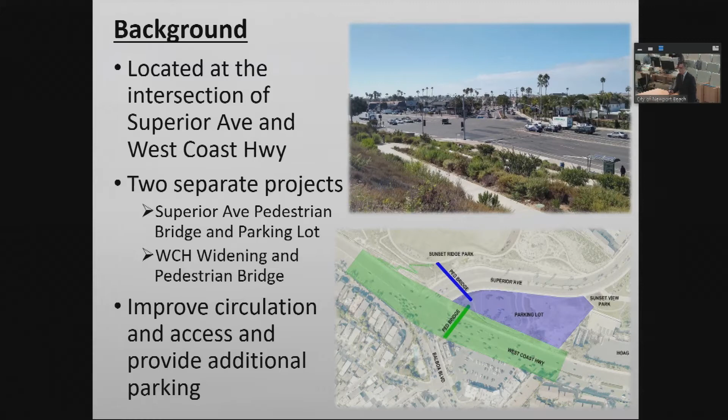This project is located at the busy intersection of Superior Avenue and West Coast Highway. The proposed improvements are comprised of two separate projects: the Superior Avenue Pedestrian Bridge Project and Parking Lot Project, highlighted in blue, and the West Coast Highway Widening and Pedestrian Bridge Project, highlighted in green. The primary purpose of this project is to improve circulation and access for both vehicles and pedestrians, as well as provide additional parking, especially for visitors to Sunset Ridge Park.

The environmental documents and conceptual design were both approved back in November of 2019. As you may recall, this project involves constructing a new bridge across Superior Avenue, constructing a larger replacement parking lot with 130 parking spaces, as well as extending Sunset View Park with additional passive use area. We are currently in the final design stage. Construction is scheduled to start in the fall of 2021 and should be completed by winter of 2022.

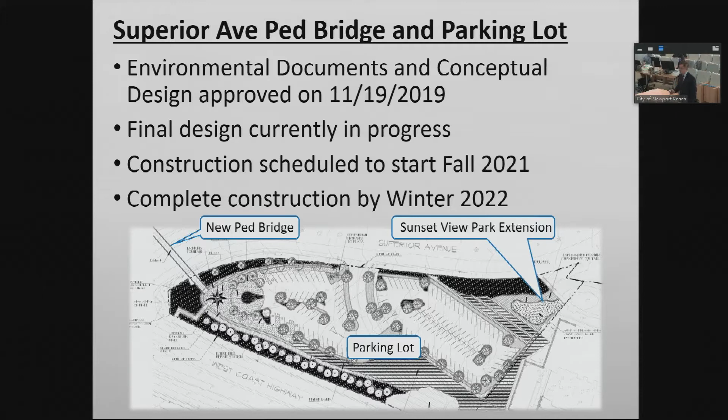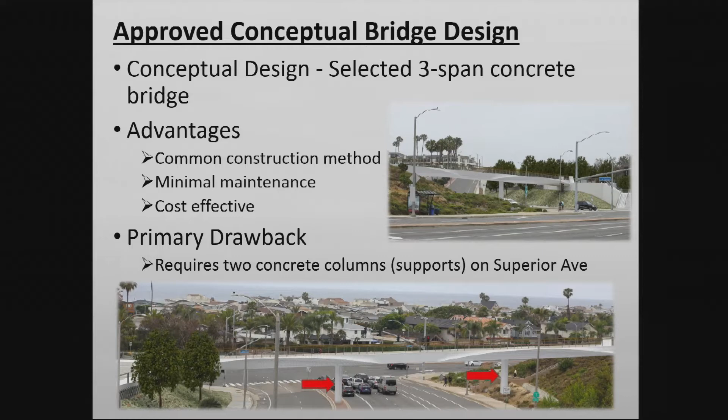As part of the conceptual design process, we evaluated several bridge alternatives and ultimately selected a 3-span concrete bridge. We selected this alternative primarily based on the common construction method, minimum maintenance associated with concrete structures, as well as for its cost effectiveness. Although this design meets all design criteria and standards, it does require the construction of two concrete columns on Superior Avenue, as indicated with the red arrows below.

During the final design process, our consultant came up with an alternate concrete arch bridge design. This alternate design shares the same advantages as the previously approved 3-span concrete bridge, and also involves similar construction costs. In summary, this design replaces the two concrete structures with a structural and aesthetic concrete arch, and in doing so, we would be able to eliminate the possibility of any vehicles hitting those concrete columns as they traverse down Superior Avenue.

We were able to verify that the height of the structure will be similar to the 3-span concrete bridge, which assures us that there won't be any additional view obstructions. Staff had the opportunity to share this alternate design with the City Council Working Group, and collectively the group was supportive of this alternate design. So staff feels there is a lot of merit with this alternate design, and we are recommending to proceed with final design and construction of the concrete arch bridge.

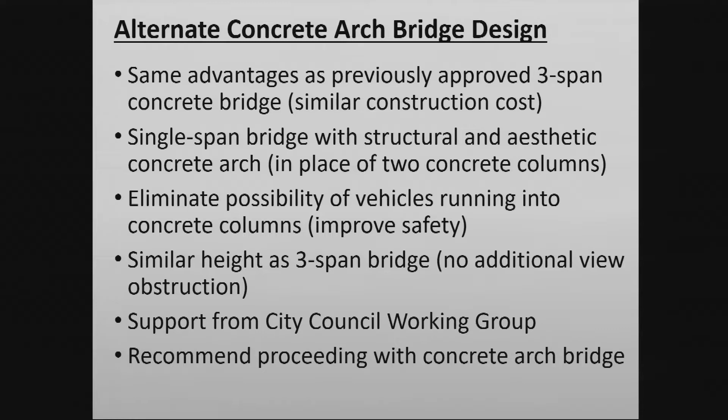Here's a rendering of the concrete arch bridge. This is a view from Sunset Ridge Park. Again, this is a single-span concrete arch bridge without the need for any mid-span supports.

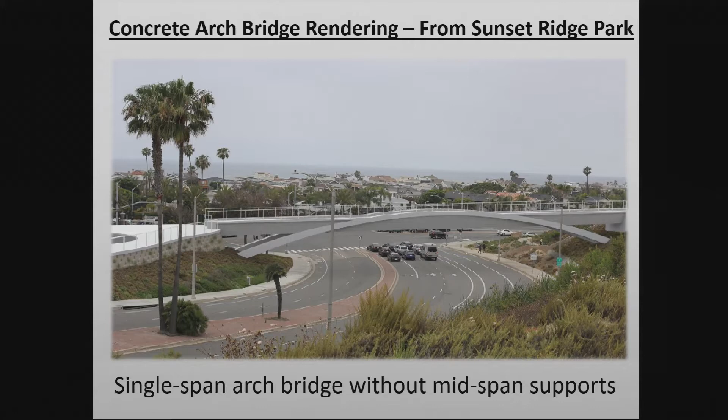And here's another view of the concrete arch bridge, this one from West Coast Highway. I do want to point out that with the approved conceptual design, we did include a staircase from the parking lot down to the West Coast Highway sidewalk. This temporary staircase would eventually have to be removed in order to construct the West Coast Highway Bridge.

Now that the West Coast Highway Bridge project is approximately 2 years behind schedule compared to the Superior Avenue Bridge project, staff thought it would be a good idea to not construct the staircase and save ourselves about $200,000 in construction cost. In the interim, pedestrians would still be able to use the sidewalks on Superior Avenue to access the parking lot as well as the new bridge.

Stay right there for a second. Ms. Dixon. Oh, thank you, Mayor.

I want to talk about the staircase. I thought the original idea to include a temporary staircase made sense, so now I'm questioning it. I'd certainly love to save $200,000, but it's going to be a while after the Superior Avenue Bridge is built before the Pacific Coast Highway Bridge is built across PCH. So I'm concerned about pedestrians still being in the crosswalk, walking across PCH for that period of time. And if they want to head over to Sunset Ridge Park, they'll either have to walk up the hill and around to get to the parking lot to cross the bridge, or they'll probably choose to walk across the Superior crosswalk, defeating the purpose of the bridge because it would be a delayed pedestrian crossing. So I'd like to know more about the staircase.

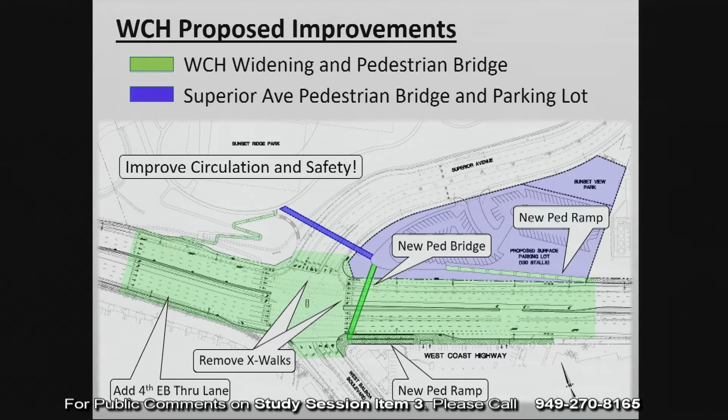All right, let's go to the next slide. So the funding for the design element or design efforts is currently included in the current capital improvement program. The city did recently receive OCTA Measure M2 grant funding, which will pay for 65% of the design costs, up to $780,000. With this new grant funding, staff is recommending contract amendments with our current design team in order to complete the environmental review and design efforts, which totals just under $1.2 million.

As part of this grant program, the city is responsible for $420,000, which is the remaining 35% of the design costs, and this is currently available in the facilities financing plan. As we complete the design efforts, staff will continue to seek additional grant funding for both the right-of-way and construction phases.

In regards to the project schedule, assuming the two contract amendments get approved later tonight on the consent calendar, staff can begin the environmental review and conceptual design next month. We anticipate completing the permitting, right-of-way acquisition, and final design by November of 2023, and ultimately completing construction by March of 2025.

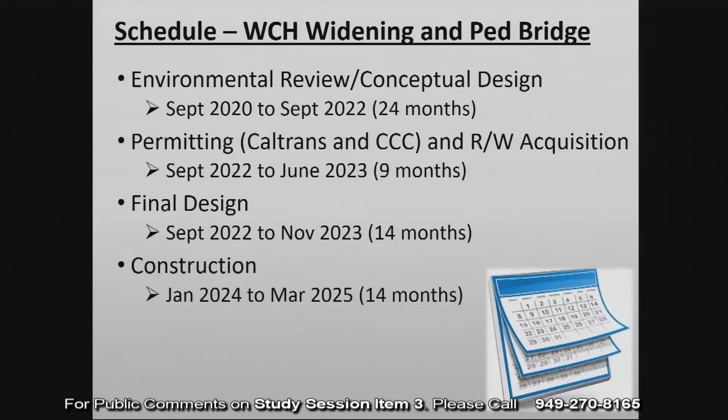Any other discussions on that? Okay, all done, Andy? I think so. All right, and you're looking to us, though, for some guidance, if I understand it. Or is it all for item 12 tonight, or do you need any guidance from us?

There are three recommendations with item 12 tonight, and again, this is two separate projects. The first recommendation is to substitute the approved structure with the concrete arch bridge, and the next two items would be to approve the contract amendments so that we can start the environmental and design phases for the West Coast Highway project.

I hate to do this. This might be a question for Dave Webb. Dave, so if let's—Andy, would you mind going back a slide, all the way back to the discussion about the stairwell? So when we get to the point—there you go, that one.

Thanks. So for item 12 tonight, let's assume for a moment that the majority of council would agree that as we're looking at phase 2 versus phase 1, phase 2 has the potential, if not likelihood, to take a decent amount of time between the completion of phase 1 and completion of phase 2. And we also agreed that the removed staircase should probably be put back in to allow for, as Ms. Dixon was talking, easier access so that people aren't walking up the hill around.

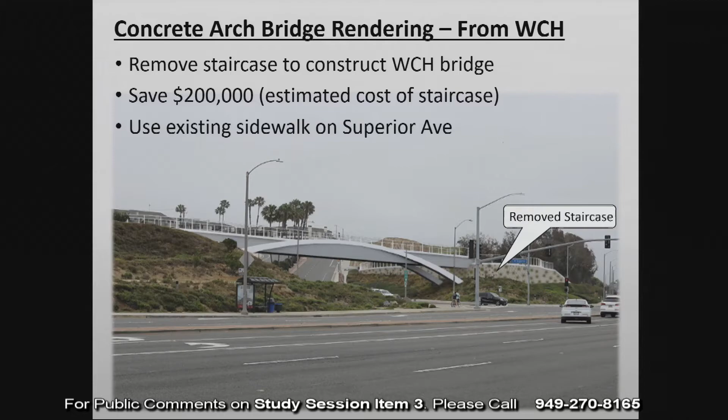I'd have to go back and look at it, but is item 12 affected at all by a discussion of the staircase? It's currently not. You could give us direction tonight on how the staircase is in phase 1. We have, I believe, the design for it included in phase 1. That's correct, so we already have it in our contract for them to do that. If you want us just to include it, we could do that, and it wouldn't take any action on item 12 to do that.

Okay, so in other words, if we gave direction right now via straw poll or something to that effect on including or not including, the next step would be when the contract is actually put out for bid, and we approve it. That's when you'd include it if we gave a straw poll saying yes. You wouldn't include it if we said no.

Actually, to clarify, you've already given us direction to include it—it's in design phase 1. We're asking tonight maybe to remove it. So if you want to keep it in as an option item, or just design it in and bid it that way, we could do either one.

Okay, all right. What I'm going to do is go out to public comment. I'll bring it back and let's have a discussion on the staircase. All right, thanks Andy, thank you. We'll go out to public comment on this item, first starting in the community room.

Mayor O'Neill, members of the council, this is Jim Mosher. Regarding the Superior Avenue Bridge, I apologize if I missed it, but I did not hear a clear statement of the total anticipated cost of pursuing the design and construction of the new arch design versus what the total cost would be continuing with the currently approved concrete 3-part span design.

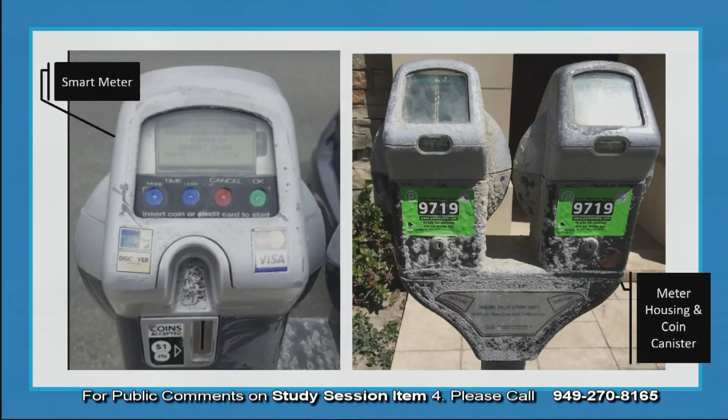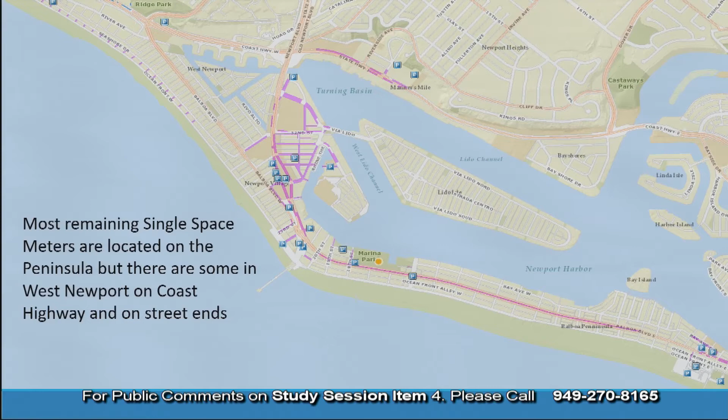So this is a very generalized map, but you can see the areas. Most of the single-space meters are on the peninsula, but they do bleed into West Newport. All the numbered street ends are also serviced by pay stations. We could pull up GIS maps if you wanted to drill down on any particular area you had questions about.

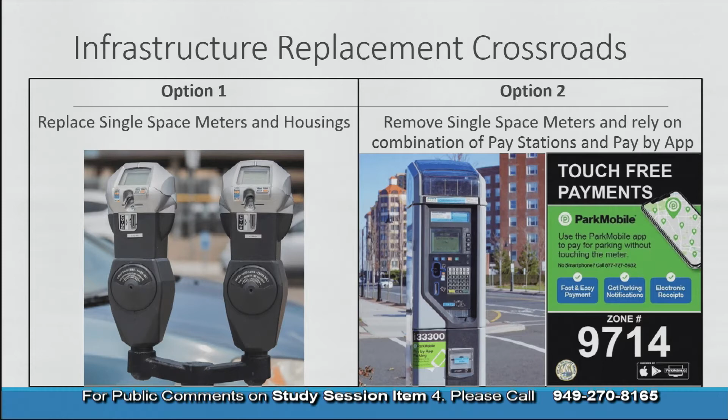So again, here's the conundrum. Option 1 is replacing single-space meters and housings, option 2 would be to remove the single-space meters and rely on a combination of pay stations and pay-by-app. The trade-off is convenience, since if you pull up in front of a meter it's right in front of you, but it'll be costly to replace those.

So the pros and cons: customer convenience and familiarity, it has the least amount of change to the general public. The meters can be outfitted with sensors to get some occupancy reporting, so that's one benefit of continuing with single-space meters. And it preserves the coin payment option, although that is decreasing as well, as most people use credit card or other options.

Cons: it's the highest initial equipment cost and monthly transactions. It also has an aesthetic effect on public areas, cluttering them. It's much cleaner when you remove those, removing the single-space meters. And you do have more maintenance requirements with 700 meters that you'd have to go by and either maintain or collect the coin, so the cost of maintenance and operating them are more expensive.

So the cost, when you look at the hardware alone, for meters and 11 pay stations, is about $1.1 million. Over a 10-year period, between the fees and transaction costs, would be another almost $1 million. And because we are further reducing our dependence on single-space meters, we would have some increased signage costs associated with replacing them with pay stations. So it's a total cost of $2.1 million.